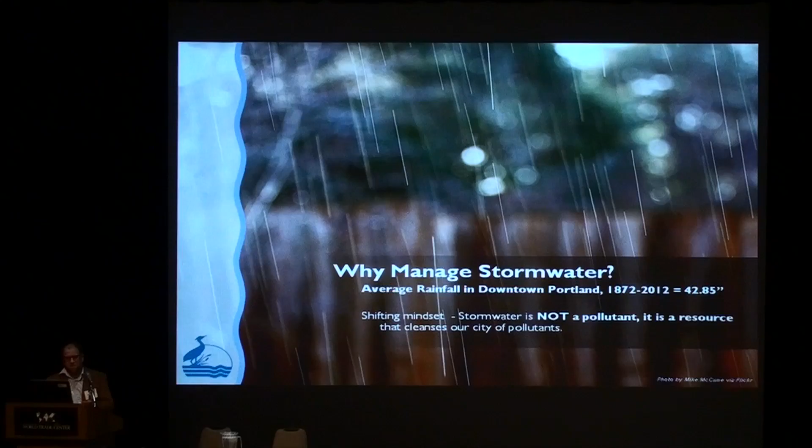And that points a lot to the Stormwater Management Manual, because it was really designed back in the late 90s under a slightly different approach to the amount of rainfall we're getting. The reality is it's increasing, and so maybe our regulations and standards have to increase as well. There's also this shifting mindset. We were looking at development in Southwest Portland in the West Hills, and we knew that whole area developed between 1950 and 1960, and we were looking at how they manage stormwater there, and the approach was they don't. They only manage sanitary sewer, and so water just runs off everywhere across properties.

And it's become a real challenge for the city, and how do we go back into those areas and retrofit to manage that stormwater now? And so as our mindset shifts over time, our policies will have to do that as well.

And a couple of the interesting things I saw back in January, some litigation that's happened down in Los Angeles, the Supreme Court, and also on the East Coast. The categorization of stormwater as a pollutant in some locations. You know, what is pollution? When does that happen? How is it actually managed? In Los Angeles with all these channels, they were trying to understand when can pollution go into a water body, at what point is it categorized as pollution.

And so with all these concrete channels leading into other concrete channels, these conveyance networks that have replaced our natural drainage ways, they weren't considered something that's being polluted. It was just conveying water. And on the East Coast, stormwater was considered a pollutant in and of itself.

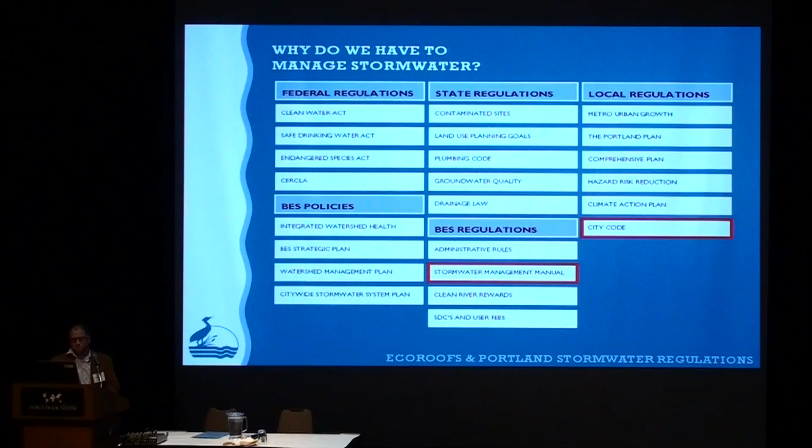And without talking about all of them, the two that I want to focus on today a little bit, because all of these things, eventually they're sort of rolled up in how we address it through the Stormwater Management Manual and through our city code. And so, there you go.

And now the cardinal sin of PowerPoint presentations, the wall of text. So you don't have to actually read all of this. The thing that I wanted to point out is that within our development code, or public improvement code specifically, Title 17, it gives the city the responsibility to manage stormwater in a specific way. And what they ask us to regulate is the separation of stormwater from sanitary sewer.

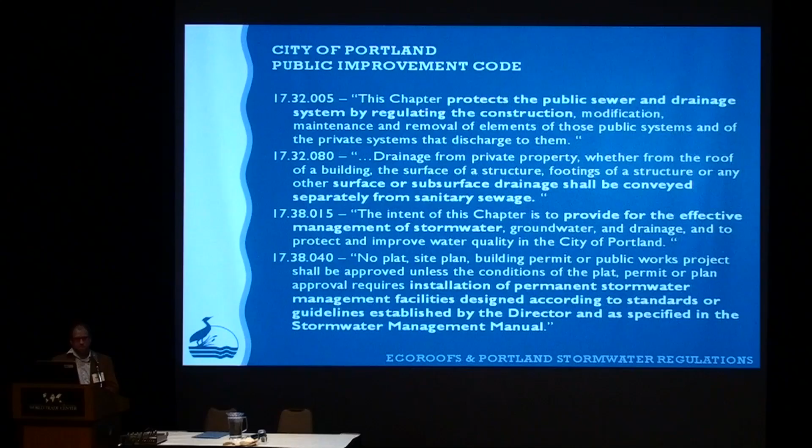And then Title 17.38 actually says that we give BES the responsibility of doing this, and the director of BES has the ability to establish guidelines, and that those guidelines eventually lead to the Stormwater Management Manual. And so through all of that, it points to the 2008 Stormwater Management Manual, which is our most current version, being how we regulate how stormwater is treated.

Now, Ecoroofs in particular, it's funny that as I was in private practice, I think I always envisioned Ecoroofs as just being another stormwater management technique. It was something you could do on a roof that managed stormwater. And as I got deeper into the manual, now that I'm working on it, I realized that Ecoroofs actually play a very different role than I had imagined, and it's significant. I think it's important that it's actually an impervious area reduction.

So it raises the bar of what that can do on your project, because in a one-to-one ratio, it essentially erases a building away from having to comply with other stormwater regulations. And so there's only a couple things that are considered impervious area reductions, and that's Ecoroof and pervious paving. Within the right-of-way, we can also use street trees, but that doesn't really apply to private property development.

And then we also have infiltration facilities, and these are the things that if you don't put an Ecoroof on, if it runs off another impervious area, these are how you manage stormwater. And all of those types of BMPs require engineering.

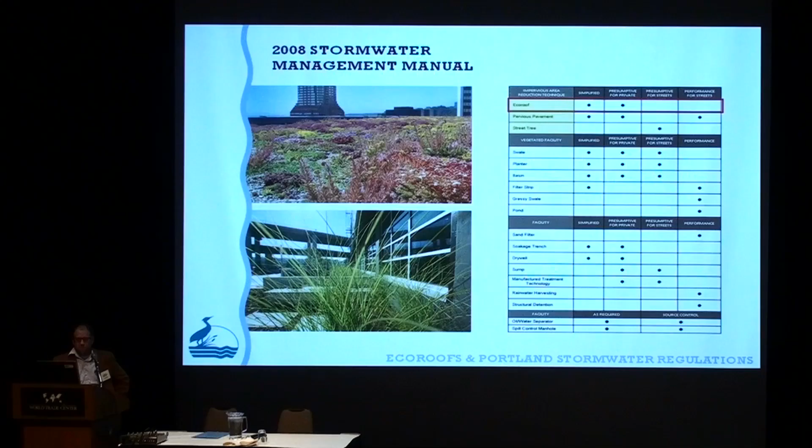They require going through the simplified or the presumptive approach or the performance approach, the other ways that developers and designers calculate how stormwater is being managed on their site. Whereas Ecoroofs in particular, if you put it on your building, you've managed it. You don't have to think about anything else. You don't have to do anything else in terms of having to comply with the manual. You've done it, in terms of roofs anyway.

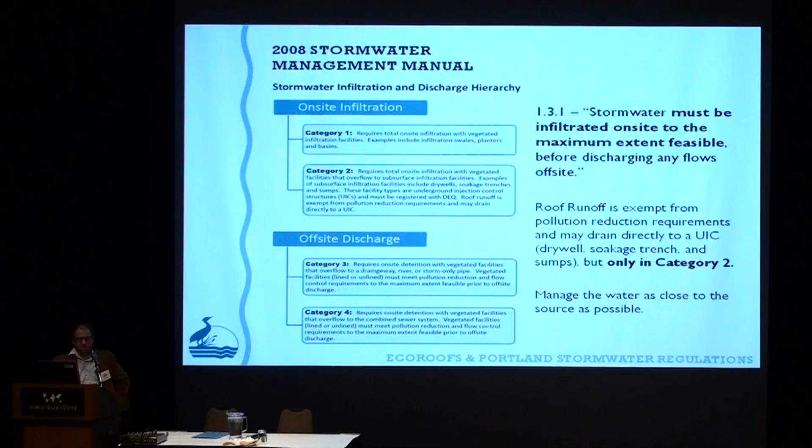And this is the stormwater discharge hierarchy. I know this is another one of those walls of text. Again, you don't have to read it all. The point being that if you have put an Ecoroof on your building, you don't have to go through this process. This is what you would do when you have impervious area that you now need to manage before it goes into our storm system or into our rivers or any of the other things that we do.

Chapter 1.3.1 in the manual says specifically, stormwater must be infiltrated on-site to the maximum extent feasible, which sort of regurgitates the NPDES permit language, and says that any water that falls on the site needs to go into the ground first. And if you can't do that, then you have to do other vegetated facilities. And again, if you do an Ecoroof, which is a good thing, you don't have to go through this process nearly as much.

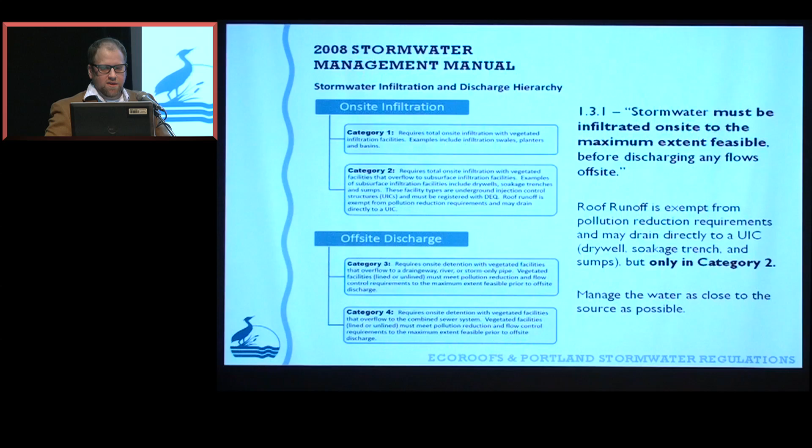So one of the things, as I mentioned earlier, I wanted to take a quick look at. Tim Kurtz in the Sustainable Stormwater Group has been doing monitoring for a number of years, and actually in June, so next month, he'll be releasing the 2012 data. And so this represents the 2010 data, but I asked him yesterday, and he said that this still holds pretty true. Ecoroofs, even though it's not necessarily considered a stormwater treatment device or a BMP, it actually functions very much like it. In fact, does it very effectively.

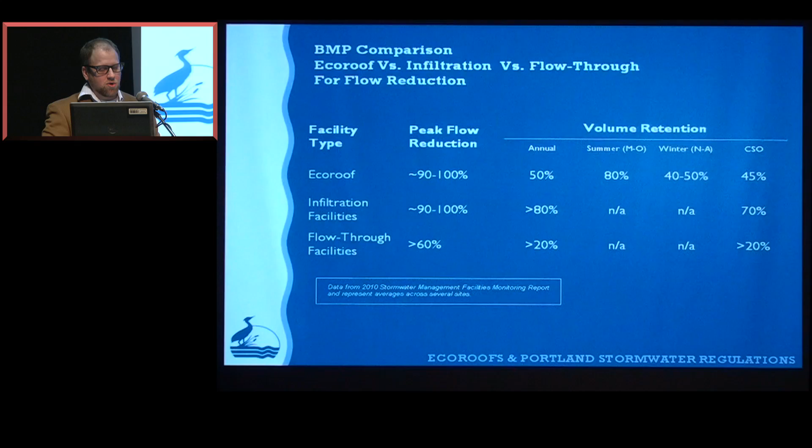One of the other things that are used a lot are infiltration facilities and flow-through facilities to manage stormwater off of impervious area. And as you can see, it meets our goals for peak flow reduction. It does it very well, and it does a very good job of volume retention as well. And so it holds that water on site longer, and it keeps it out of our system, and means we don't have to spend huge sums of money to actually do something with that stormwater once it gets into our system.

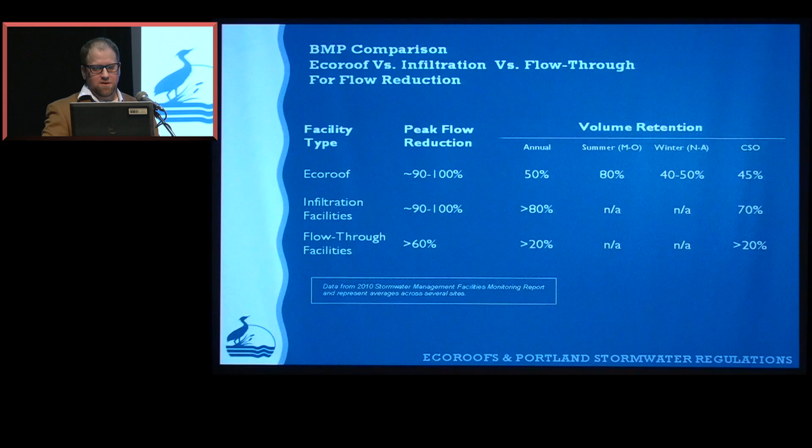So this leads us to the actual regulation, the 2008 Stormwater Management Manual. And what does it say in that manual about Ecoroofs? Specifically, Ecoroof requirements, again, the sizing, we do have a sizing requirement, and the good thing is that it's a 1-to-1 impervious area reduction ratio. If you put it on your building, you don't have to calculate it any further than that.

One of the other things I've actually seen come through permitting and some of the discussions we've had with them is that there have been some instances where people are taking upper roofs and piping them into the lower roofs thinking that that's okay. And the manual specifically says that you can't take another impervious area and dump it onto an Ecoroof, because it does overload the system. So it's something to think about as you're going through the design process.

Another: maximum of 25% slope on a building. Alice actually showed me a picture yesterday of a residential project that might be pretty close to that. Might be the first one I've seen. But if you do exceed that, then you actually have to go through the process of documenting how that Ecoroof actually manages runoff. Because early on, when Tom came up with the idea of an Ecoroof, they sort of baked into it the fact that it was managing that runoff. So if you exceed that, then you have to show that it still works.

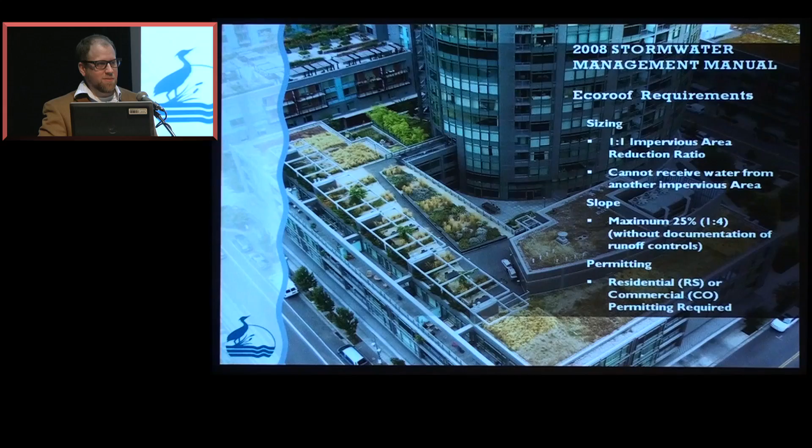And then all Ecoroofs have to be permitted in the city of Portland. And that can be done both under residential or commercial permitting. So one thing I thought I would also show you real quick too is what happens when you submit as a designer or a developer with your project to BDS for review. And the process that they go through in actually reviewing your Ecoroof is they look at the drain layer to make sure that there's one that exists.

The manual does currently require that there is some sort of drainage layer called out, and that it clearly indicates where that water goes in our system. Does it tie into CSO? Does it go to some other system? Whatever it is, it needs to be clearly called out on the drawings.

And then they also look at soil layers, the composition of the soil, the weights of it, the depth, how deep is it. We do have a depth requirement in the manual, and I'll get to that in a second as well. We look at the vegetative layer, what type of plants are you proposing to put on the roof. And sometimes that actually comes back to our Sustainable Stormwater Group, and we'll look at that during the review process to see what sort of species are being put up there and to make sure that it complies with the manual.

And then the amount, how much, what kind of coverage do you have? If you have pots at 30 inches on center, I don't think it's going to get through very easily. But there's other alternatives, cuttings and things like that, and they review that.

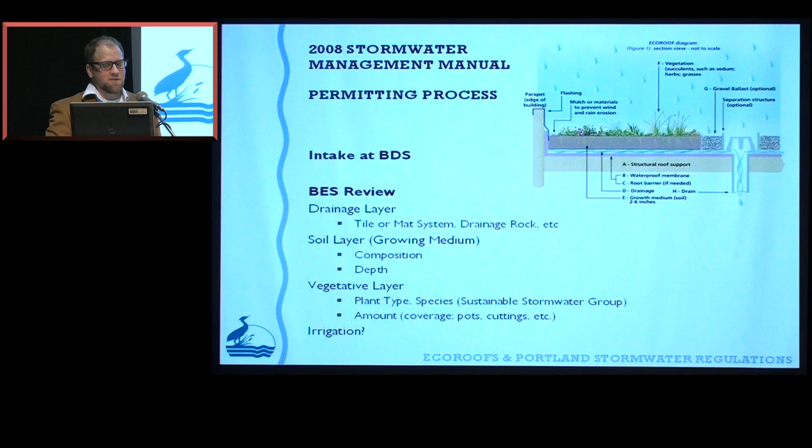And I have a little question mark next to the irrigation because we've gotten questions from BDS recently. Right now we do currently require irrigation as part of the manual. But there's been a lot of discussions, and Tom's going to talk about it here shortly. What happens when you design a roof that doesn't need irrigation? How does that get through the process? And so there's still a question to that, and we're trying to work through that.

So specifically, the Ecoroof requirements that are in the manual: vegetation has to be drought-tolerant plants. Sedums fit that bill really well. 50% in evergreen species. Again, sedums fit that really well, and you have to have a 90% coverage in 2 years. Cuttings, pots generally seem to do a pretty good job of that, and it is reviewed. You can have a maximum of 10% of non-vegetated components on the roof. That means ballast, access pavers, things like that. And that can be figured into your calculations, and it will be part of the review process.

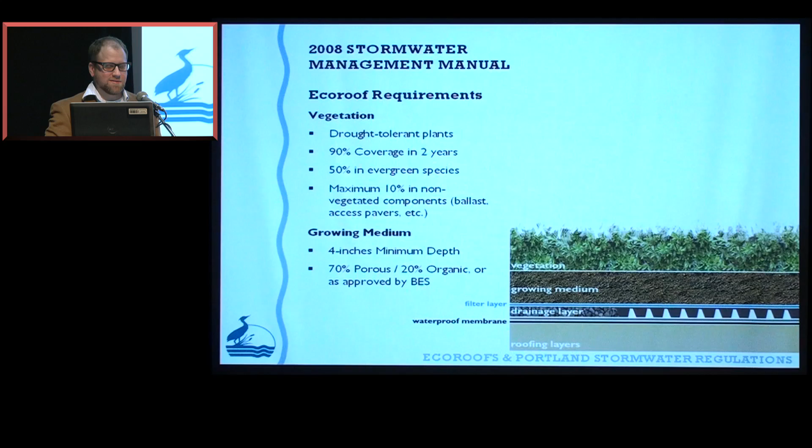And the growing medium, all of these things are actually in the process of review as we're going through the revision of the manual. 4 inches depth of soil, that is a requirement, but we do see buildings come through on a regular basis that have less than that, and then they are approvable, but that is currently the minimum standard. And that relates a lot to volume control, as well as the treatment of the water and various things. So it has to be 70% porous, 20% organic, and again, all of these are reviewed through BES at BDS. Pardon me for all the acronyms, and it doesn't necessarily have to comply exactly. These are guidelines. I will say that out loud.

Also, you need to have a drainage layer again. Filter fabrics are optional. And I did find this the other day, someone asked me this question, and I didn't actually know the answer to it, but the growing medium itself can actually be considered the drainage layer. So on smaller roofs, do you need to have a big gravel layer below it or this expensive tile? Perhaps not. And if you can show that it doesn't need it, then that may actually count as the drainage layer. And the whole goal is to provide the designers with this relatively simple system that meets the stormwater needs.

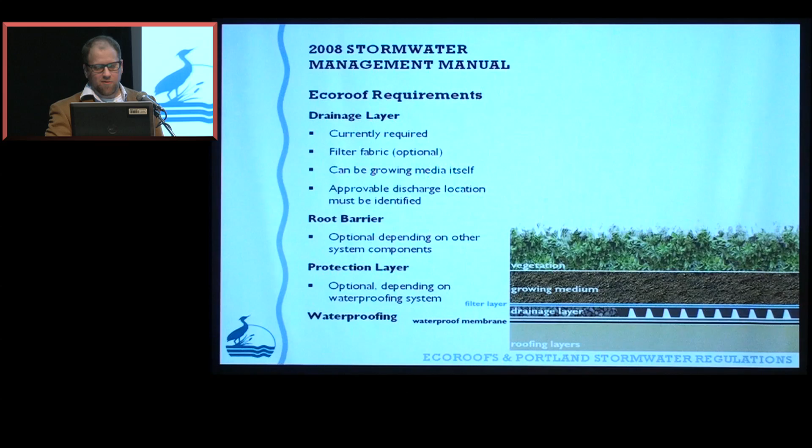And then a protection layer and root barriers are both optional depending on what type of waterproofing you have and what your system looks like. So that's really it for the components on the roof. It's really simple and it's pretty straightforward, I think.

Part of the process that you also have to do is submit an O&M, operations and maintenance, with your submittal. And within those maintenance requirements, you have fertilizers. They can be non-chemical only. Pesticides and herbicides, nope, can't have them, sorry. No, because that'll just go straight into our waterways if that's how the overflow works.

Irrigation, again, it currently is required, and we do have standards that say that shall not exceed a half of an inch of water every 10 days, and I think we see a lot of Ecoroofs that when they do have irrigation on them, they tend to have a lot more water than is really necessary, a lot more than we're asking for within the manual. So as you design those systems, really look closely at how those irrigation systems are set up, because it's not the same as an ornamental area. And then post-establishment, after it's grown in, a quarter inch every 14 days if you choose to keep it.

I see a lot of operations and maintenance submittals through BDS that either skip over irrigation completely or don't address it. And it's okay if you don't want to have irrigation in it. It just needs to be clearly spelled out in the O&M agreement why that's the case, how the roof is going to be established, how it's going to be maintained, and if irrigation isn't part of that, then make a case for it.

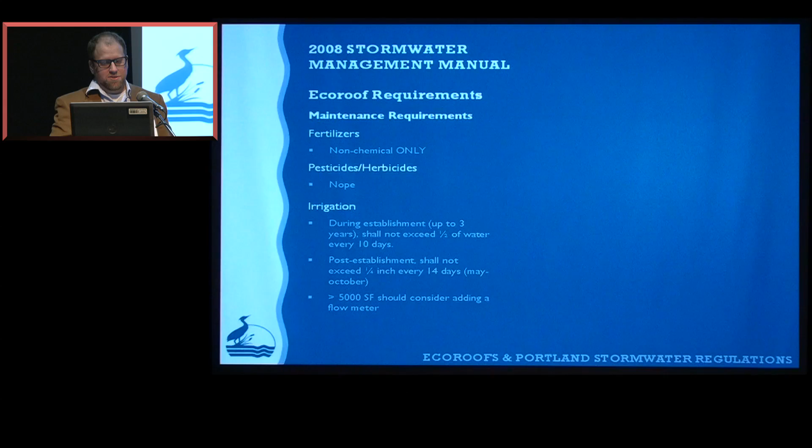It can be approved. And then again, for buildings that are more than 5,000 square feet, we've seen that flow meters have actually been really effective in helping monitor that flow and making sure that it works really well. So, lots of boring stuff. I hope it's useful.

And then you have LEED certification credits. These things will help you with LEED certification. Other green building certification programs, we've talked about that a lot. Floor area bonus ratios, we have a lot of very similar things that Chicago has.

And without getting too much into it, one of the conversations Linda and I had the other day is now that we have 400 Ecoroofs. I'm sorry, I didn't realize it was 500. Man. But now that we've had this, have we arrived? Have we gotten to the point that, with all the effort that was put in, Tom's efforts in studying it and our incentives, we don't need those incentives anymore? Do we not need those floor area bonus ratios?

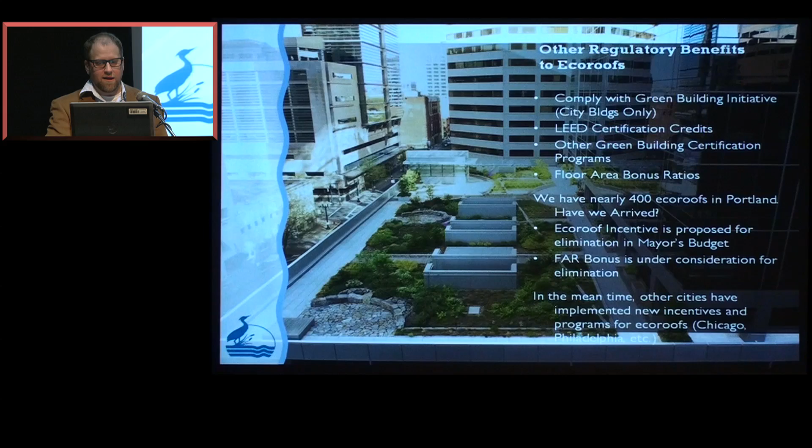Jumping into the future just a little bit, what's coming down the pike? Again, the Stormwater Management Manual is under revision. This is the first time I've actually said this out loud to the public, so hopefully it's okay. But we are currently targeting January of 2014 for a release of a new Stormwater Management Manual.

The good thing for a lot of developers and designers right now is that really this is only a process and format revision. The only thing that we're really focusing on is preparing ourselves for the larger 2016 updates, which I think I could say safely will probably be the most significant update since 1999, or since the original manual. There will be a lot of revisions and double checking to see if we're complying with our current permit requirements from federal and state agencies.

And the other thing that I think is useful to share with you is that the Stormwater System Program has also, besides just the Stormwater Management Manual, which used to be just a project, there was also a project for an overall citywide stormwater master plan. And those two things have been combined into a program so they can actually talk to one another.

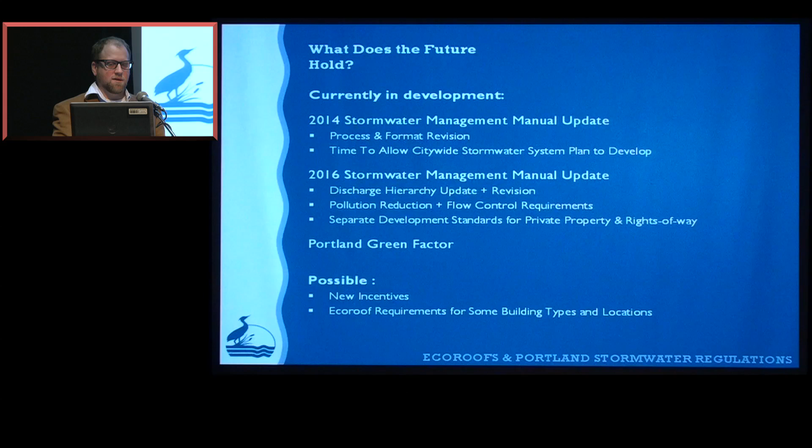And over the next couple of years, maybe we can share this next year. I hope there's enough data that we can share it, because it's pretty exciting what they're doing in terms of taking a lot of the same high-resolution data that Chicago's been using and looking at a new citywide stormwater master plan that will allow us to help update the manual in such a way that it no longer becomes this one-size-fits-all for the entire city.

We can start looking at individual parts of the city and what the requirements are in the West Hills with no infiltration versus the east side of Portland where we've got tremendous infiltration, and being able to approach how those areas need to comply with that manual in very different ways. And a lot of the stuff that's going to come out of that system plan is going to inform that. And so we have to wait a little while for that information to come.

And once that does, then the 2016 Stormwater Manual update will include our discharge hierarchy updates, revisions, our new pollution reduction and flow control requirements. All this will be part of a pretty wide open public process. So for people who are interested and invested in how this works, you'll have the opportunity to share your thoughts and opinions on that. And then also to really clearly define separate development standards for private property and the rights of way.

We do have Green Street details, and we ask a lot of private property developers to just comply directly with those details. And once again, because it's a one-size-fits-all for the entire city, sometimes, admittedly, there are situations where you're required to do something in the right-of-way that maybe doesn't have the biggest system benefit. It's still a requirement in that particular location.

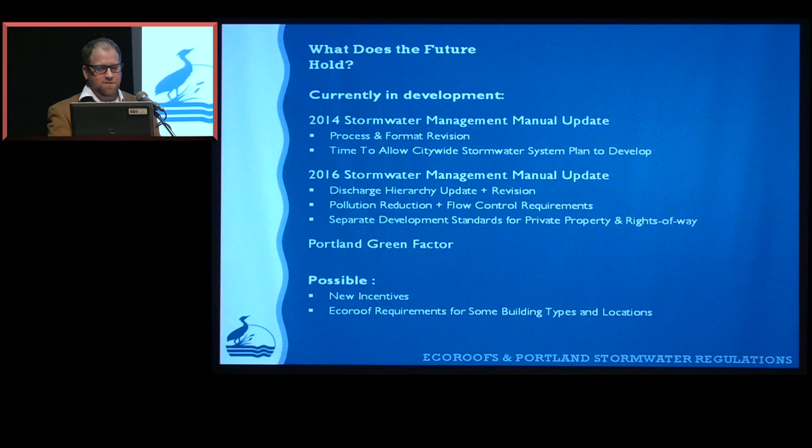So, I don't know how much detail I should go into on this. Some of these slides came from much longer presentations, but I'll talk about them a little bit. So the stormwater manual, I'm going to call it the SWMM, if that's okay. We call it the SWMM. It's so much easier than saying things. The SWMM revision process, the first one in January of 2014, again, is going to focus primarily on process and format.

We're planning on splitting the manual into individual volumes. The idea being, right now that manual exists as an administrative rule. It's kind of difficult to update. There's different parts of it that want to be updated at different times, and so we're looking at splitting it apart and allowing us to be more flexible and agile in how we update that manual.

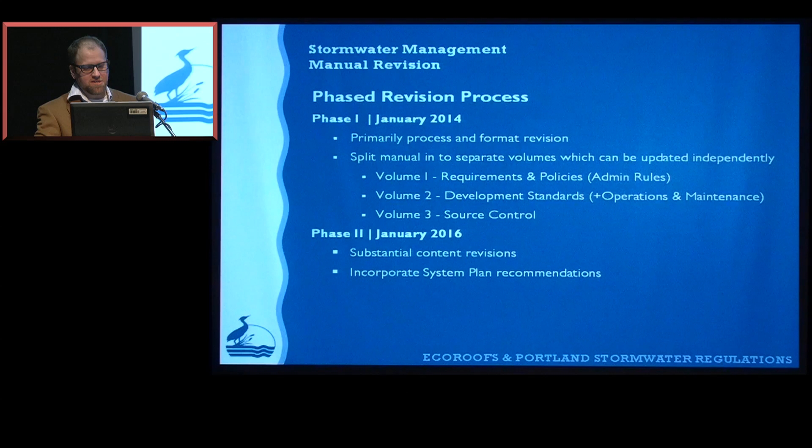And what that doesn't mean is that we're going to update it every 6 months or something like that. It just gives us the ability to update something like source control and pollution reduction, that's very different from our development standards, on a different timeline. And then 2016, again, the Phase 2 update, the more substantial content revisions and incorporating a lot of those system plan recommendations that we hope will be developed soon.

A little more detail, I won't go too much further than this, but the Phase 1 update will include some treatment Appendix B updates for some of you that did deal with treatment devices. Chapter 4, our source control and pollution reduction, will be updated. And for a lot of the landscape architects and people who have to use the PAC calculator, I hope this is a good thing for you, but we're going to update that and actually hopefully make it a web-based tool as opposed to being something that's an Excel file that you have to download and deal with.

And then, again, the Phase 2 revisions: discharge hierarchy, the development standards being separated from private property versus the rights-of-way. And then we talked a little bit about the potential of design overlays. I didn't say that specifically, but the idea being getting away from the one-size-fits-all approach and having different watershed standards, and then being able to hone in on a particular area that's got some real problems and create a specific design overlay that gives us different options.

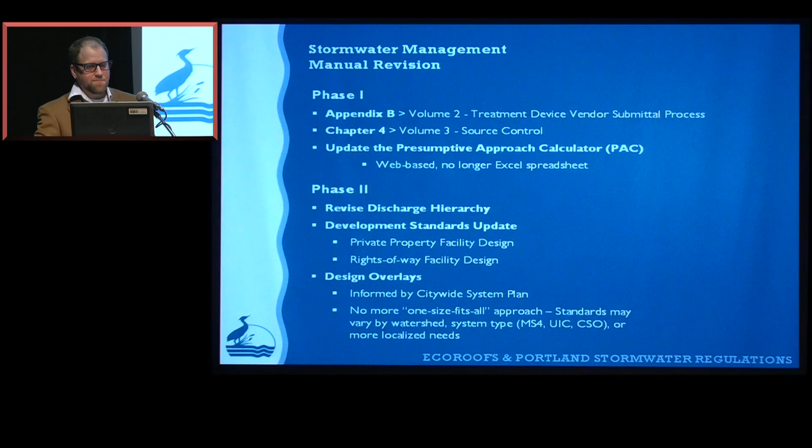I'm going to grab a drink of water real quick if that's okay. Oh, yeah? Is it already getting that late? How much time is left? We're done? Okay. Well, we'll talk about green factor some other time. See if there's anything particularly interesting.

I will say that in our efforts in the green factor, the thing that really stood out is that ecoroofs were a really strong component of making the potential of the green factor very, very strong in Portland. And we think it's got a lot of potential to be really useful here. So there we go. Thank you very much. I apologize for taking so long.

Again, I think that there are a lot of things that we could ask Brian, and I want to encourage all of us to do so in the break and at the end of the day. And it's interesting, the difference in approaches, in that our ecoroof approach really grew out of the stormwater issues and how we would address that. And now we're broadening, and I think Chicago has had different drivers as well as stormwater, and so it'll be interesting to see how those all come together over time.

Well, it gives me great pleasure now to introduce Tom Liptan. Tom is a registered landscape architect with the City of Portland, and he had worked for the city for 25 years, and he worked with us actually in sustainable stormwater and just retired this December. So now he's out on his own, so we can all share in his wealth of knowledge, and we miss him, but I know he'll be around. In Portland, Tom has really been a catalyst behind research and development of vegetated systems, both on the roof and on the ground, for buildings, sites, and street designs.

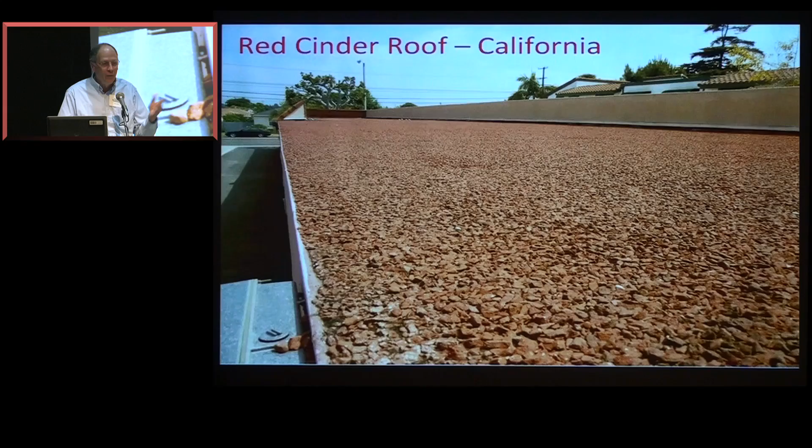So it was interesting to run into. That was just last May that I was there and saw that. But anyway, so talking about non-irrigated, non-red cinder roofs, and I'm going to talk more about the red cinder in a minute, but we've had some experience with city buildings.

So this is the Swan Island Pump Station. It was installed in 2005. This is what it looked like in 2012. It was planted with 100% sedum, but a lot of the native and non-native plants in the region have colonized the roof. 9 months out of the year, it looks like this. And then 3 months out of the year, it turns totally brown.

And it's very isolated, so it hasn't been mowed yet. The typical thing in the western United States when you get a lot of tall grass and it turns brown, especially on freeways and things, is we mow it because it's a fire hazard. And potentially that is an issue in the western United States with regard to fire if you have grassy roofs. This is completely isolated out in the middle of nowhere, and it's not likely to have that problem, but that is a question as it relates to this. It's covered with sedums underneath, so interesting.

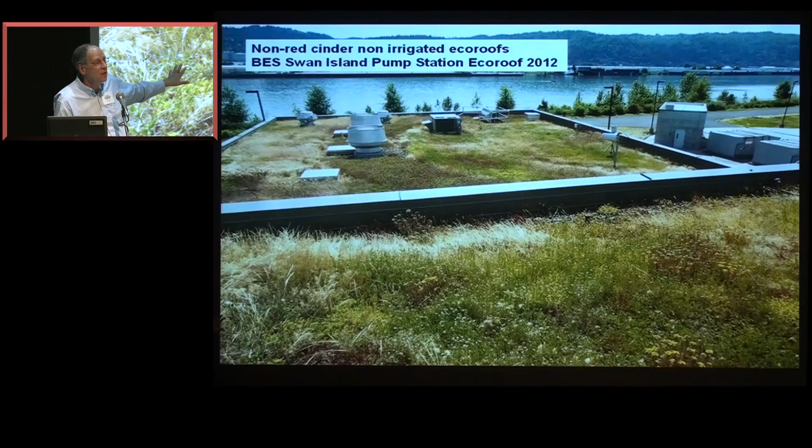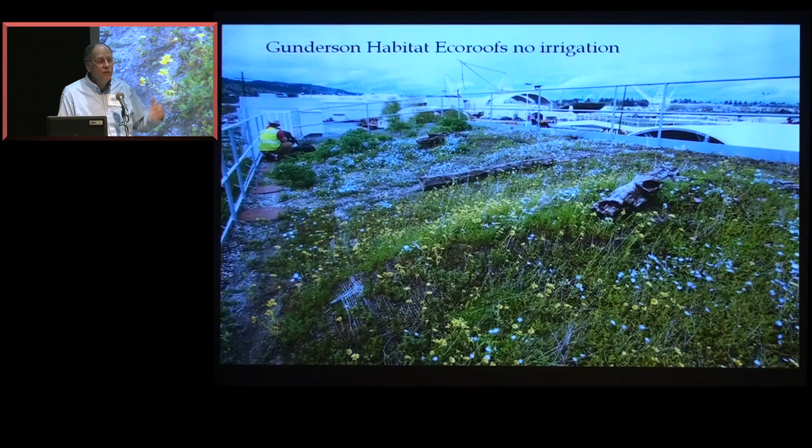This is just another one that's a non-irrigated, non-red cinder, and this is on the Gunderson building. It's their habitat roof, and this turns brown in the summer as well.

Now, the red cinder idea was an idea of trying to work on this after all these years of looking at all kinds of designs and having lots of people tell me what is and isn't true about this concept of vegetated roofing. And there are a lot of really smart people that had a lot of good information. It was really helpful. But I started thinking, well, how do we know that a roof is doing well or not? And quite often we'll blame something on the plants, or the designer, or the maintenance, or not having enough irrigation, or the soil.

And so a lot of the people in the industry, and I'm not going to name anybody's product here. If I do, it's by mistake, so we'll erase it. But anyway, so these are different products. These are little sushi containers, and this is how I started looking at this red cinder idea. I started actually testing the soil products that are put out by different companies. Quite a few are there anyway. And then I started experimenting with the red cinder idea, and I started looking at how well that worked.

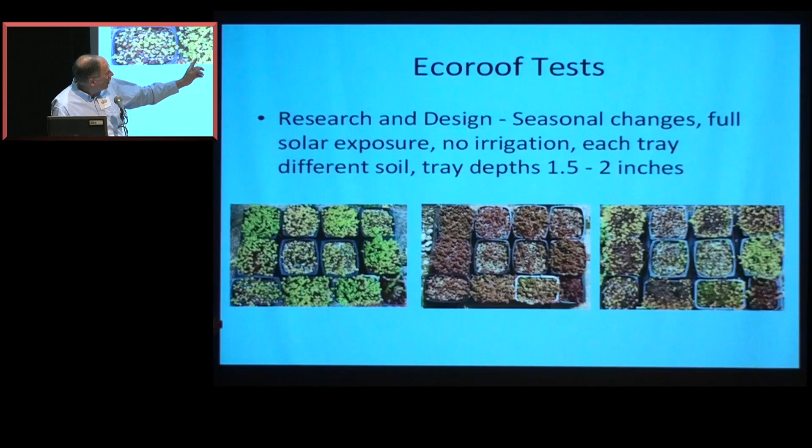So you can see that even though they're different in terms of how well they're doing, they're all actually surviving. You see more on the extreme right there, some brown areas where it browns out in the middle, but then it comes back in the fall. So all of them work, and the cost for the growing media is anywhere from $30 to $90 per cubic yard.

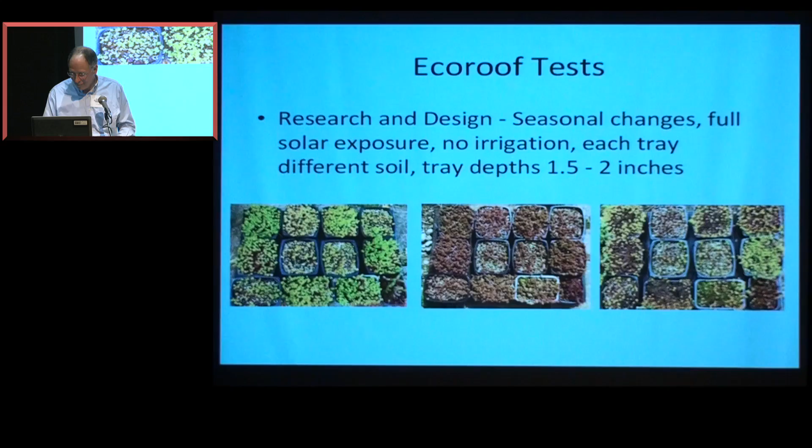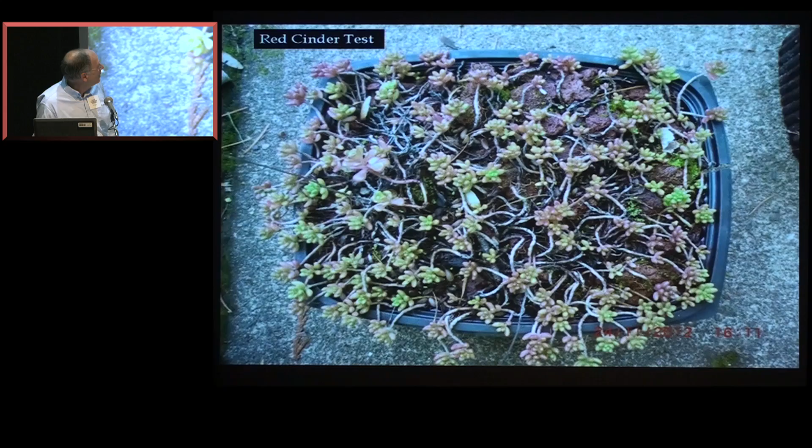So how do you know who to buy? And I'm not going to tell you. But there doesn't seem to be a lot of difference, at least on my backyard test. Now, this is not science, I want to caution you. It's Tom's backyard testing. So this is my red cinder design, and it's in the typical tray. It's about 9 inches by 6 inches. And that's what it looked like, as you can see on the bottom right, in November.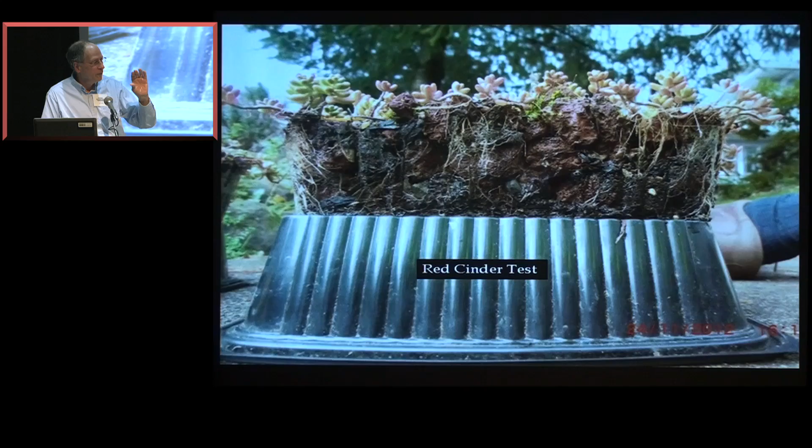It's actually been through 2 summers without any irrigation whatsoever at my test location. And this is what it looks like from the side. You can see the red cinder, and there's just a little bit of soil down on the bottom, so it doesn't even have much soil. Now, this test was not to see how well it manages stormwater or how well it insulates the building or anything else. It was just to see, could the plants survive without any irrigation if they were protected by this concept, which I'll tell you in just a second.

And this is how it works. So the idea came from years of watching this stuff, of going out into nature and then watching Ecoroofs, because I got up onto a lot of roofs, plus the Ecoroof in my garage and other Ecoroofs on my porch and things like that.

But the bottom line was, it seemed that shade, especially when you look in the Northwest, seemed to have a big contribution to the success of a lot of sedum living in our kind of climate. And I want to try and explain our climate to Michael, but he might know enough to already know it. Extremely low humidity. So when they're getting extremely high humidity in Chicago, we go down into the teens in the summertime, in the hot afternoon. At any rate, shade plays a big factor in that.

And then the idea of protecting the soil from erosion and from the potential death of the plants, and then not having coverage. So those things that Brian talked about, the guidelines for 90% coverage and everything, that came from me about 10 years ago. So it's kind of like, well, 90% didn't mean that it really had to be plants.

It could be that it was also something that protected the media, especially where you get reflective heat, and you can't keep plants alive in some of these locations where the reflection from the building is just killing them, and you might as well put some gravel over the top of it and call it good, because it'll grow in the other locations. So some of those things in the manual would be good to revisit and see how that might be addressed. So the other aspect of this is the plants.

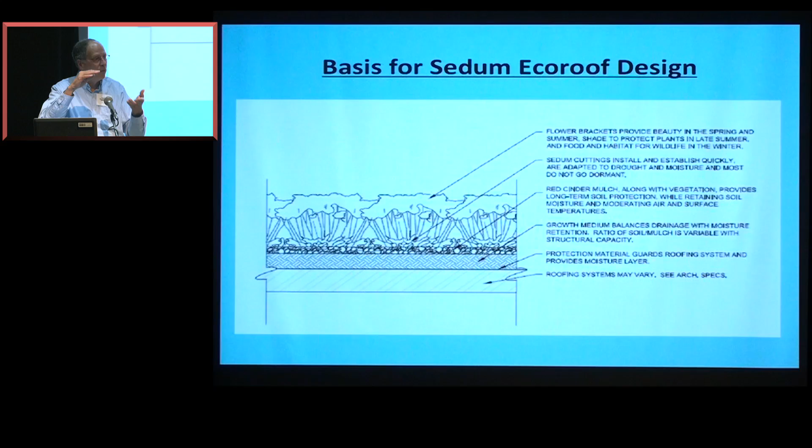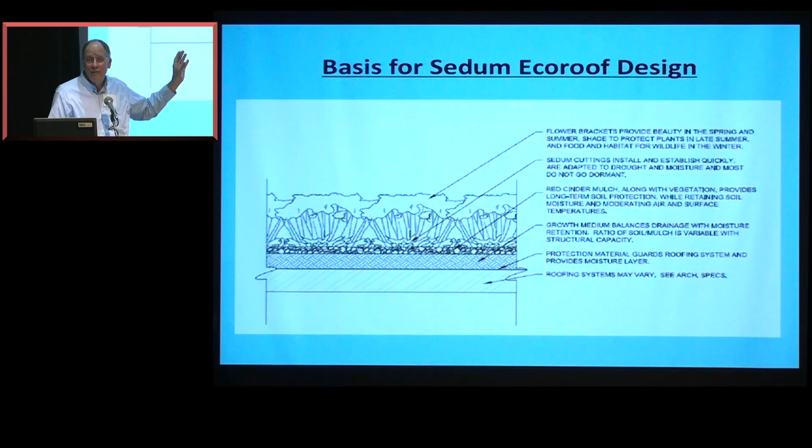And it doesn't matter if underneath you have the drainage mat or a moisture mat or anything like that. You can have the mat or you don't have to have the mat. This design doesn't care what you use. And this design is also applicable to all the different kinds of designs for you architects out there that have to deal with what kind of membrane and where you are going to put the insulation. Is it going to be underneath, on top, or all these other questions? Those questions still need to be dealt with. This can go right on top of whatever you decide, with maybe one or two variations.

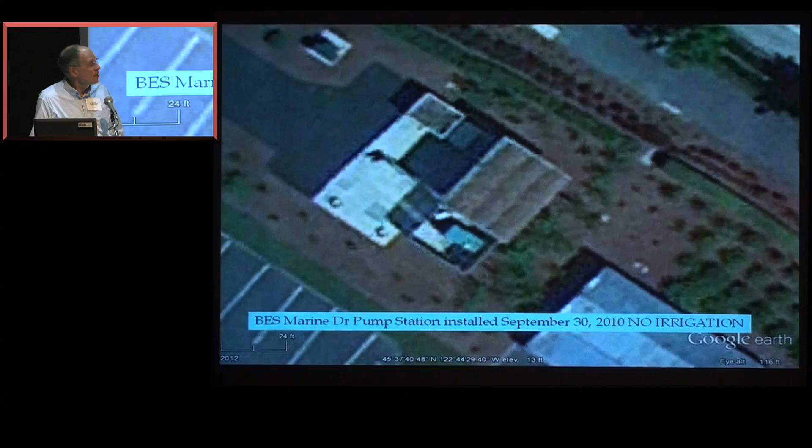Anyway, sorry about this photo. It's a Google shot. But this is our first one that was done as an official City of Portland project. So this is the red cinder roof. It looks brown there because those are the flower stems; after they bloom, they leave the flower bracket and it's kind of brown, and that's the umbrella. And this is what the roof looked like when it was first planted on my birthday, 2010.

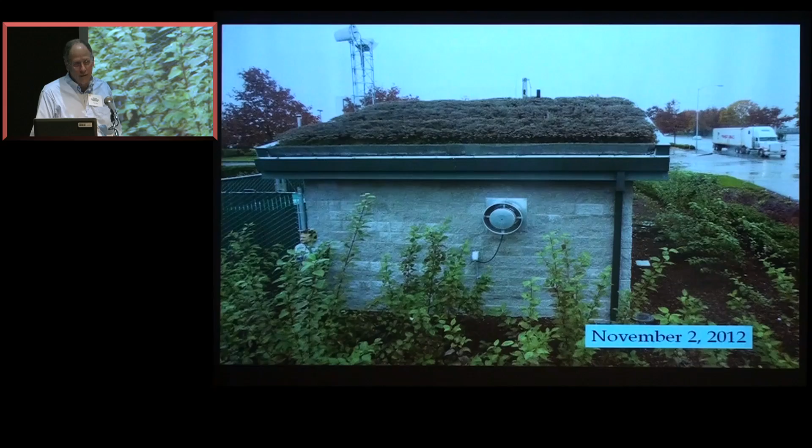And then the other thing about this is protecting the membrane, which a lot of developers and architects have said, well, if I'm going to get 2 roofs out of 1, and I'm going to keep my building for a long time, that makes economic sense for me to do an Ecoroof. Why not?

And then here's our second project. This is out at what's called the Screenhouse at the sewage treatment plant. For all of you who have been wanting to go to the city sewage treatment plant, you should go. We've got a really beautiful building that's going up that's magnificent architecturally, and I hope in all the other ways too. But this is out at the Screenhouse. There's a stairway up to this, and you can go up there and you can see it.

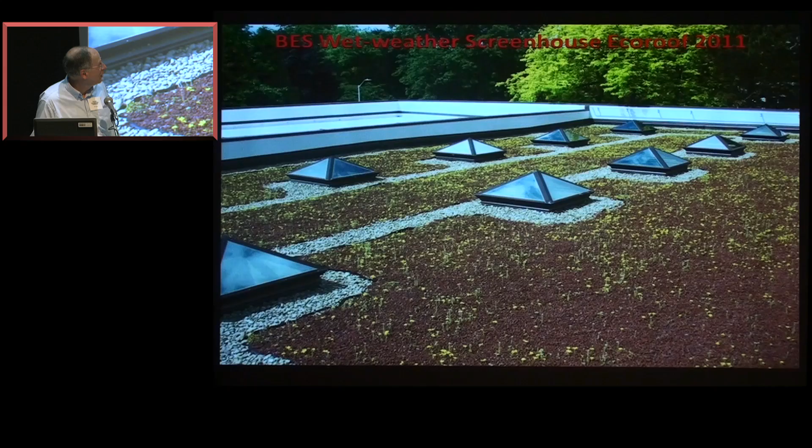And one other thing is, I'm not talking about this red cinder sedum Ecoroof as if it needs to be exclusively sedum. I mean, there are many things. It's almost like painting a picture and you put the basic color on the canvas. This is the basis of what you could do. If you want just this, you can leave it just this. And if you want to do more, you can add bulbs to it, you can add seeds to it, and you can make it more diverse and make it actually more aesthetically pleasing as well.

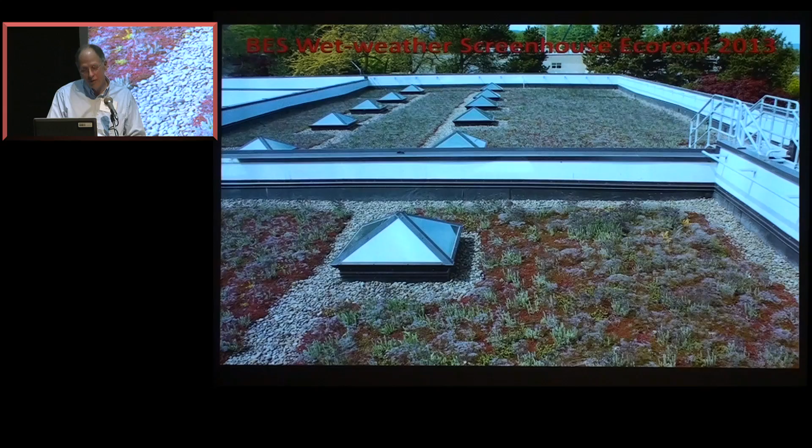And this is what it looked like the other day. And you can see the red cinder. Really, you can't tell the red cinder from the red sedum because a lot of sedum turns red, and this has a lot of the sedum that turns red on it. Anyway, so this is 6,500 square feet. So this is 2 years, 0 irrigation in 2 years.

And actually, in 2 years, we've only pulled the weeds once. So Casey and I, Casey Cunningham with the team, we went up there last April. It took 2 of us 15 minutes to pull the weeds on 6,500 square feet of roof. And this year, there's hardly a weed to be seen, although there are a few, if you want to call them weeds. I actually don't think they're weeds.

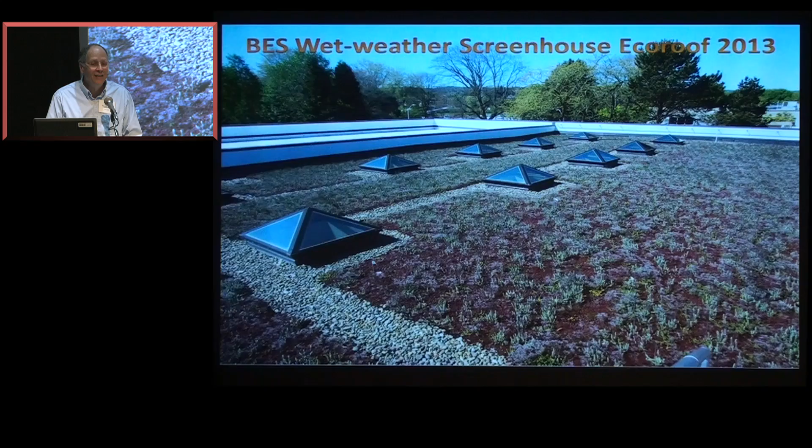And I have a different way of looking at things.

Anyway, and then this is a close-up of that same roof. So that roof right there, when you get close, in one of the parts that's kind of green and red, that's what it looks like. It's that thick. Now, there are some places where it's just the red cinder, where plants have not filled in or they haven't grown yet. And these are all planted with cuttings. So for some reason, the cuttings didn't take in certain areas, but the red cinder there, it's coverage, it's protecting the soil, and the plants will grow in as time goes by.

The other thing about this idea of not irrigating is that if you have a failure and you have enough area that plants have died or not grown, the concept is in the fall to get sedum cuttings and just sprinkle them around. So in lieu of irrigation, you use replanting every fall. So you don't have to have all the pipes, you don't have to have all the water and things like that. Now, it's pretty hard for a lot of us to think, well, plants are going to die and you're actually going to watch them die and not water them. Well, yes, that's the idea, because they're finding their place and they will eventually work everything out, at least in the last 10 years that I've been looking at this idea and watching Ecoroofs.

And there's a place where there is some exposed red cinder. So it's just a little rock that's full of holes, and it's used in the landscape industry all over the place. And then we planted, that's Emily's, I think. She brought it in, and we put it up there on the roof. Thanks, Emily. It's doing fine.

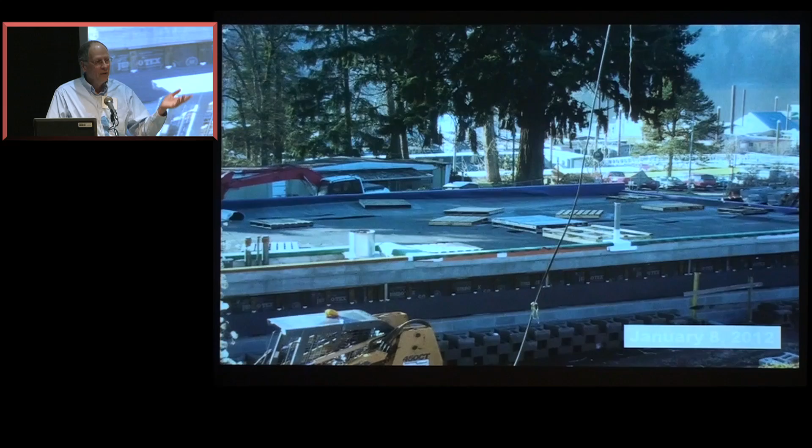Okay, now here's another one. This is the most recent one. This is publicly accessible. This is the one you can see off the bike path. And so this is the Sellwood pump station. This is what it looked like last year. And I just thought I'd give you some shots. So again, it doesn't matter what kind of membrane you use. This green part of the project, all those decisions have to be made. And this is the project. I'll just show you quickly.

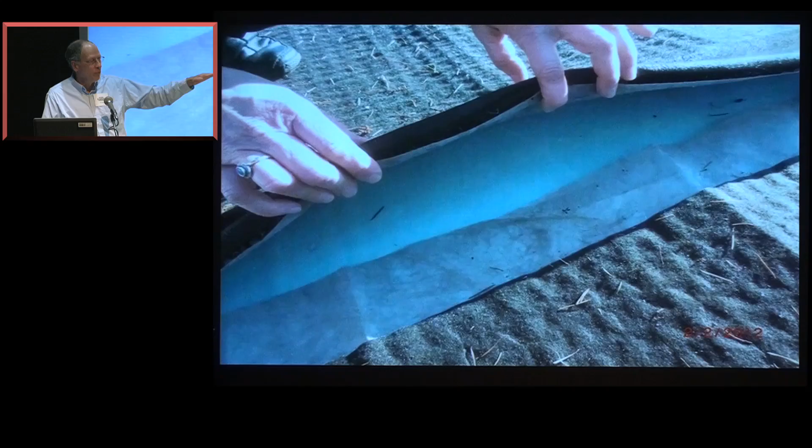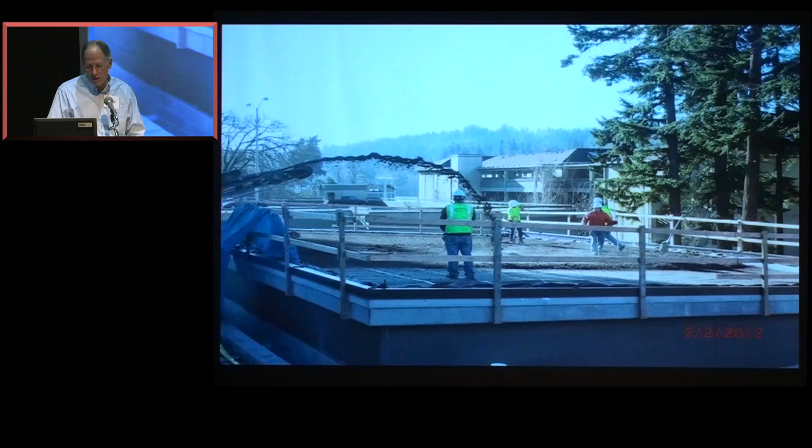It does have the insulation on top, so it has a drain mat on top of the insulation board, and then the soil goes on top of that. And then some material there. There's only a little bit of edging at the downhill side of the facility. They're shooting the soil on there. I didn't know if any of you had seen this, so I thought I'd leave these construction shots in.

Smoothing it out. I used to have in the spec that I did with the Bureau that you needed to roll it. You really don't need to roll it. Having more texture to the roof is actually probably good, because where the people are walking and you get a little more depth, it adds diversity to that. As long as you put the right amount up there, you can roll it if you want. You don't have to roll it. It saves a step. It's less expensive if you don't roll it.

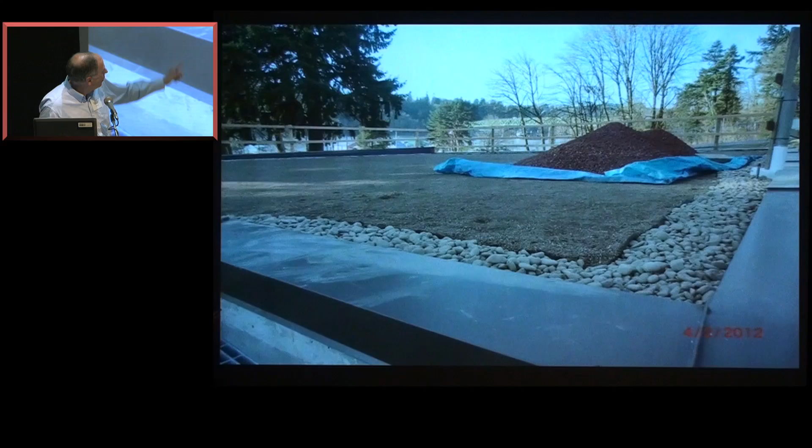And the edging material, we've been really eliminating the need for edging material, which is this.

I guess I'm not going to be able to do that. We don't have a pointer. Oh, there is, yeah. That's right. Oh, I heard you say, you almost hit somebody.

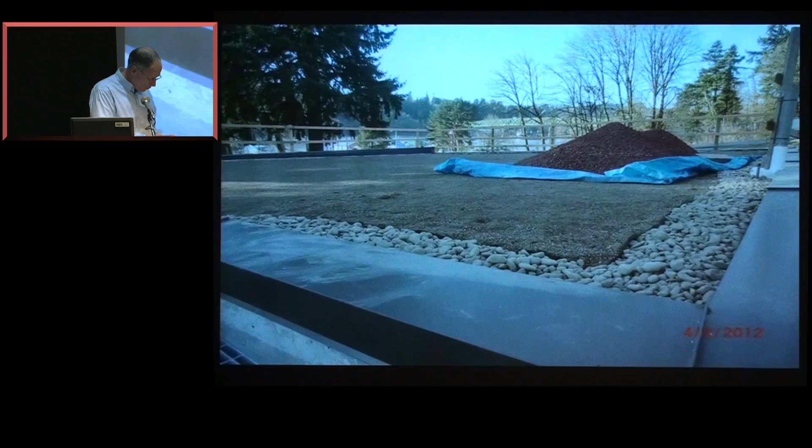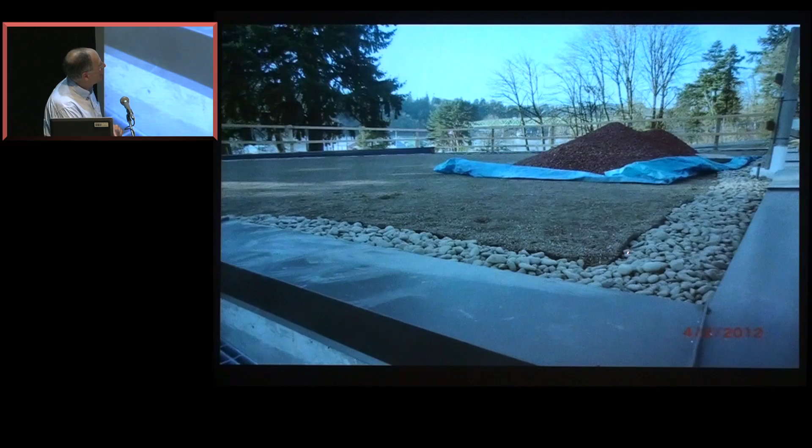So this, instead of using the expensive material, now I know some people sell this stuff. I know it has a place. I'm not opposed to it completely, but there are some locations where you don't need the steel edging. So the steel edging's down over here at the downhill side. And at the uphill side, it's not used. And eventually the sedum just covers all that up and you can't see it anyway. And this is using fabric to separate the material. And then that's what it looked like.

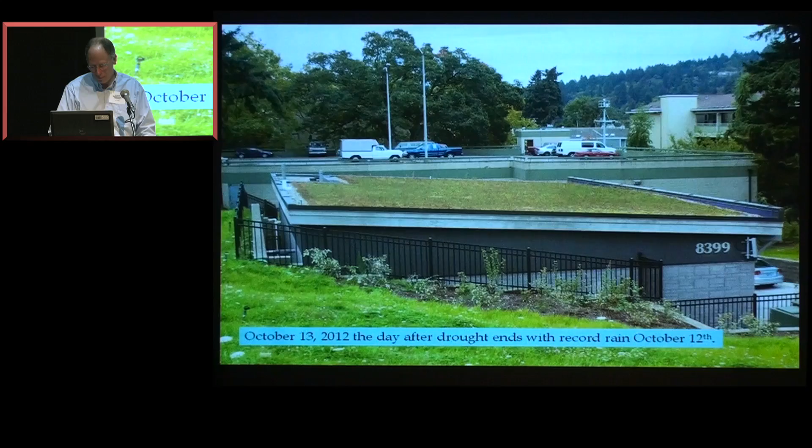This is before the drought last year, after it bloomed. This is one day after we had the end of the drought, and on October 12th, the day that ended the drought, we had the highest rainfall for October 12th in recorded history in Portland. So how do you like that? We had a record drought and then a record rainfall to break the drought. And anyway, so this is what it looked like in June, and this is just one shot.

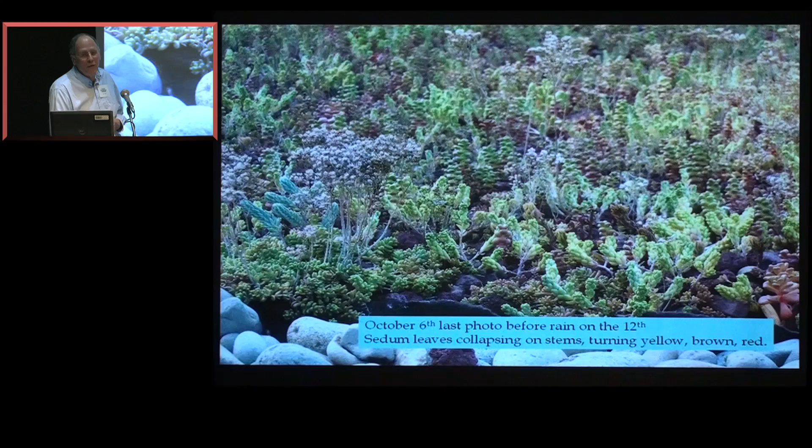Not too many people get up to a roof, but if you look at this carefully, you can see that the sedums are stressing. They're all kind of going like this, you know, it's like, oh my God, it's so hot, and they're screaming. I mean, if you're there, you can hear them. It's just making your heart go, oh, I want to water you, but I can't water you. If I do, I won't be able to stand up and tell people that it works.

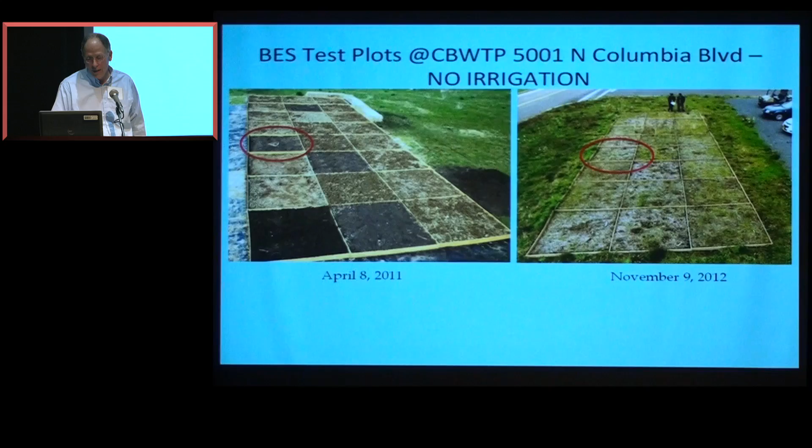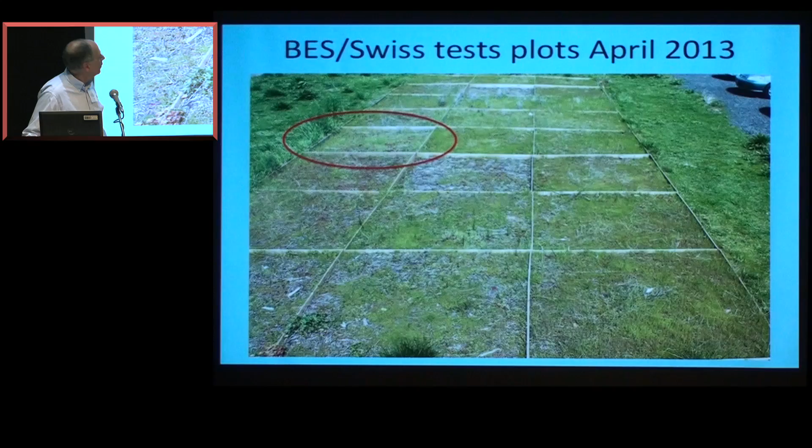So here's my favorite. If you go out there, you might pick a favorite if you're somebody like me. I like that one, and it's only 2 inches, and I think it's very lightweight, and Casey has all the information about what each particular cell is. And then close up, you can see it's got a lot of grass, and we are the grass seed capital of the world. Oregon is, so we get a lot of grass in our climate.

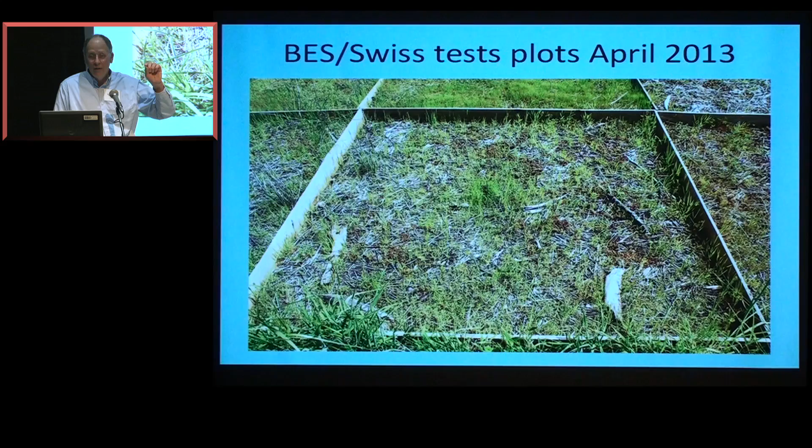And then there are sedums, and this has got straw as the cover, not red cinder. These are about 2 years old now, and when you get really close, here's our native sedum. Sedum divergens is a really tough sedum plant, and it's our native. On the east coast of the U.S., it doesn't do very well at all, but it really loves it here. And you can see the soil's about 2 inches, and this is the chopstick calibrated in inches, so that's what it's growing in.

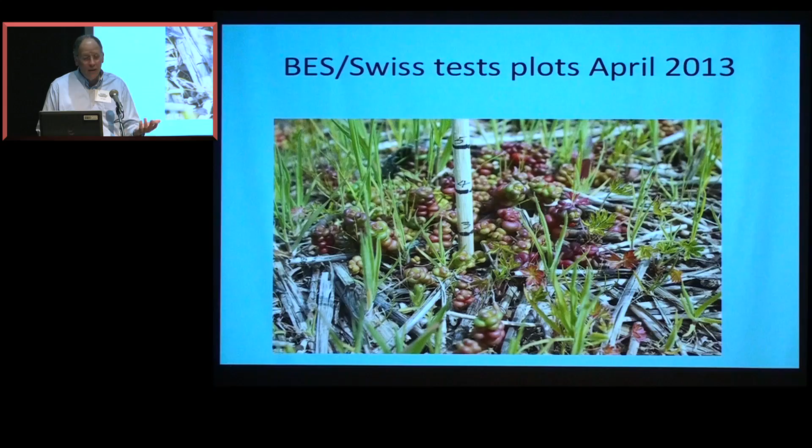2 inches of material for 2 years with 0 irrigation, and this is what it looks like. Now, here's some kind of wild, I don't know if it's a wild geranium or if it's an invasive geranium or a non-native geranium, maybe not invasive. So there's that, and then there's these grasses, and that's just what we get in our climate if you let it go.

Now, another thing, the Ramona, which was or is the largest Ecoroof in town until Walmart finishes its roof, or maybe Gray's Landing, anyway. So this is a section of Ramona, and I took this April 24th, the day before the tour, because I had to see if it was still alive. This section of Ramona does not receive any irrigation. All the rest of the roof receives irrigation.

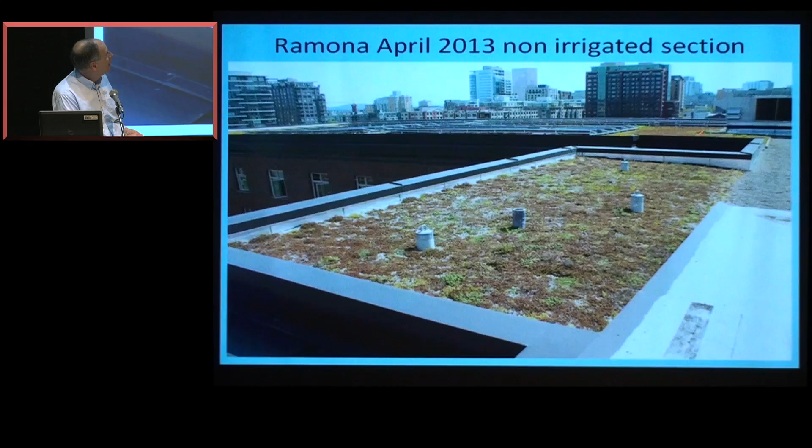You can see that the plants look kind of richer right here, so they do better. I mean, if you water it, they will do better. But look at how well they do here. And then, to be fair, there's a close-up of what you're looking down at. So look at who's doing the best here. Sedum divergens, Sedum oreganum, Sedum divergens, and these are the other non-native sedums. And isn't that interesting? Those natives. I did this to make Mary's day. If any of you know Mary, she's the native person.

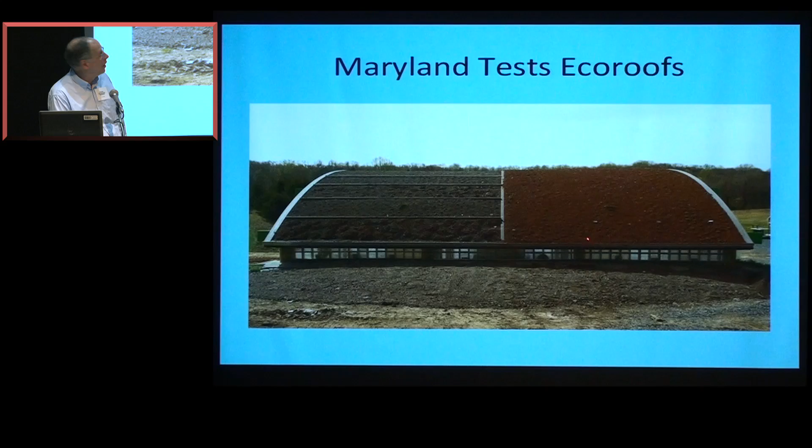So here's Ed's approach. This is a very steep roof. It's got a nice curve on it. They've got two different methods of holding the soil on. This one's inconspicuous. Here you can see Ed's, he's got the things going across. So that'll be very interesting to see how that works out. And then they gave me some samples of their stuff to put into my little sample area, which is getting bigger and bigger. So here's one of my red cinders, these are cuttings. And this is his material, so East Coast, West Coast.

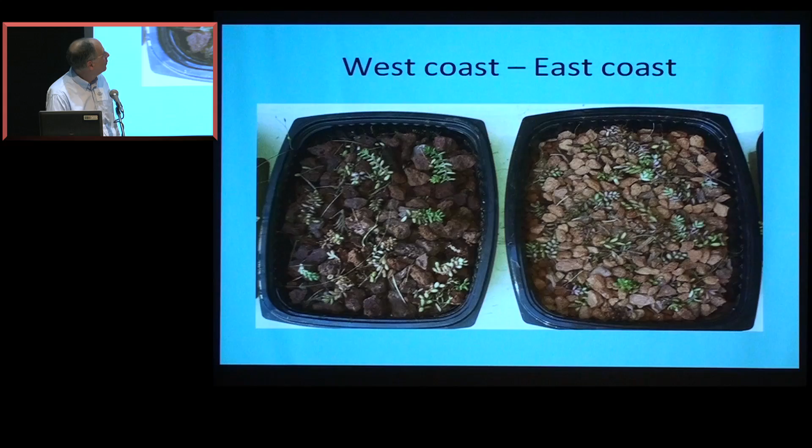Anyway, the other thing that strikes me is that NASA is putting Ecoroofs on their buildings, and they have quite a few already in the eastern United States. And I thought, kind of the red cinder with the Mars idea. And then to get back, Brian made a comment about this, and I think it's a really important one for us. When are we going to be able to achieve something like this in the city?

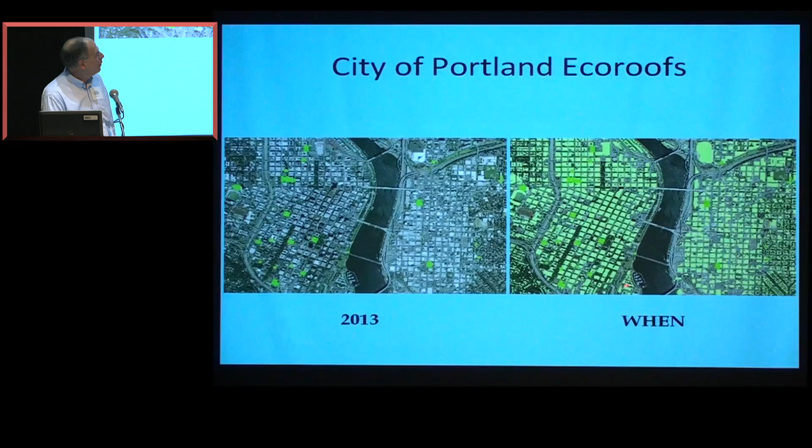Just to refresh anybody's memory who was here last year, Dan Vizzini, who gave our keynote, and he was with the city of Portland, said something to the effect, isn't it time that we actually made it a regulation to put Ecoroof on buildings? Haven't we learned enough? Don't we know enough about the benefits that we could make a pretty good case to City Council, and City Council ought to be thinking about it themselves, that really the time is nigh. So I just leave it with that.